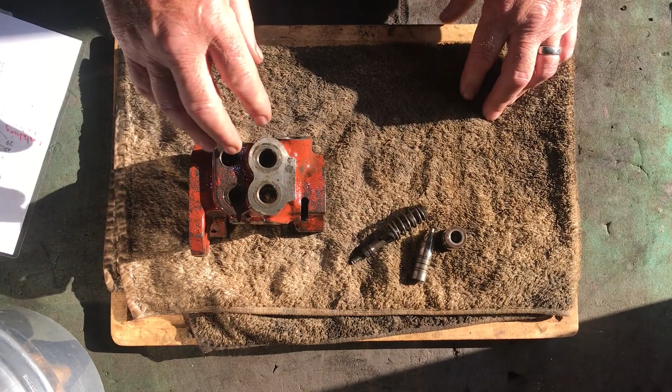Right, valve chest. What we did, we'll pop this into a pan, pressure cooker, with water in. I'm just going to go back in there in 5 minutes. We steamed it in there for 20 to 25 minutes to let the heat from the steam penetrate the casting as much as we possibly could.

It then went from the pan into an ice cream tub full of diesel, and it sat in there for 2 weeks. I was going to leave it in there for a week, but then we went away on holiday, so I thought I'll just leave it sitting in the diesel and let it chill. When we came back from holiday, popped it back in the pan, heated it up again, popped it back in the diesel. When it cooled, got it out.

Obviously the spool is in here. Put a punch on top, gave it one firm tap with a hammer, and it moved about 2 or 3 threads. Then I turned it upside down, put the punch on the bottom, tapped it, knocked it back in again, and it moved about 4 or 5 threads more. Turn it back over, punch on the top, whack again. Just kept doing that - the movement got bigger and bigger, and it eventually came out.

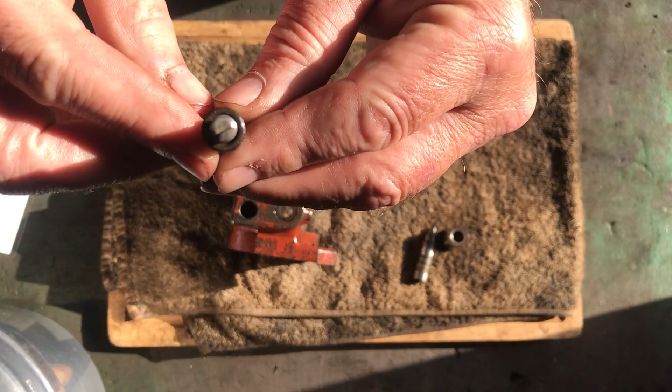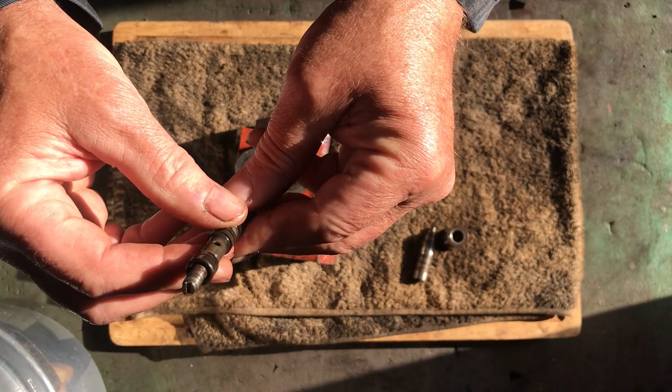You can see on the end there, there's a little bit of rounding over from the punch, but that's just a screwdriver slot so you can hold the spool still while you're tightening the nuts onto there. That'll dress up, that'll clean up a treat, no problem. The place it was rusted in was just in the top here - this part of the spool valve was the one that was rusted in.

When they popped it out, all this was full of oil. Looks a bit grotty, but they're nearly 50 years old. So there, the edges on there are absolutely razor sharp. So it hasn't worn.

I don't think it's seen a lot of abuse. I think the tractor's been abused, but I don't think this valve's been abused as such.

So the next thing, that was the spool and the spring came out, right, that was out of this hole here. The next thing was the insert in the relief valve. This is the one where the dump valve screws on the top of here.

This is your return valve, the overflow valve, isn't it? This one puts the oil back out here, comes around, sprays oil all over the gearbox and everything out of this one. The insert was stuck in here.

We got this one out by putting the 3/8 UNC bolt into it, pulling the insert out and punching the cap out of the bottom.

This one, let's have a look. Where's my little bag of toys? This one we got out by using a 6mm concrete anchor bolt. Not this particular bolt, because the one I used got deceased during the extraction process.

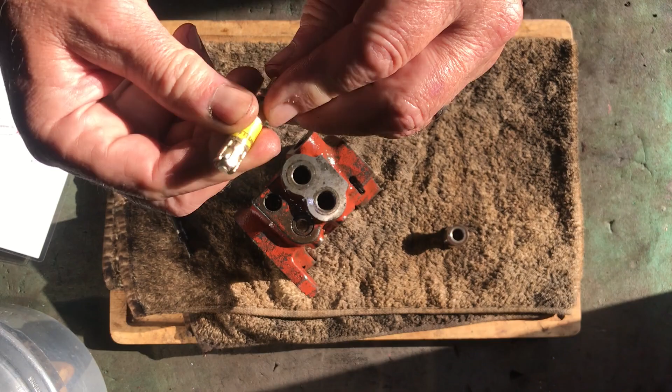What I had to do was, in the bottom here there's a little square nut, so we had to push the threaded section through till the nut popped out the bottom, which allowed the fingers to close up even more. There's a little retaining spring on here that wraps around, that keeps these fingers under control. I had to take that off because this would enter up to the spring, and then the diameter of the spring would catch on the top and stop it going any further.

So what I did was I whipped the spring off. The nut was out, as I said. We'll pop that down. We then put that in as far as we could get it.

So what we did again was we knocked it back into the hole, we pulled it out, we knocked it in, we pulled it out, and that started it moving. Eventually it came out. You can see on the bottom of here and on the side here where the corrosion is, where it's had a hold down inside there.

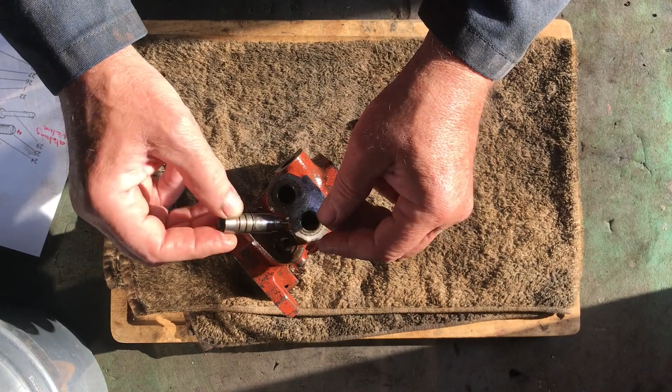That's still a bit tight, so what we're going to do is give this a polish with Scotch Brite. This will get a polish up with Scotch Brite on the faces here and down in here, and the holes will get a polish with Scotch Brite and maybe a bit of Brasso polish.

We're going to try not to do anything that is invasive or aggressive, because bearing in mind this is probably the most detailed and intricate part of that tractor, and literally if you haven't got a valve chest, you haven't got a tractor.

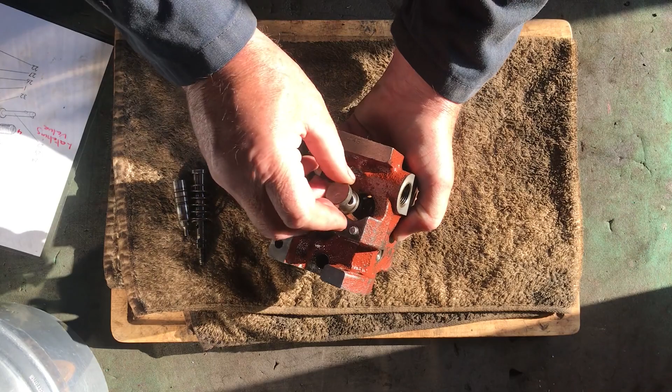That left with a cap, so we pulled the insert out. That left with a cap on the bottom, so we can get in here now, put a punch down in here, punch the cap out the bottom. You can see on the cap there, in the bottom, there's a bit of very light surface rust forming.

That took, you had to be firm with that to get it out, because that in there is a really good fit. It might be that when we come to put it back together, I'm going to pop this in diesel or pop it in oil, and I'm going to heat this up so it expands slightly, just a touch, enough to make it easier to put these two caps back in.

I have heard Shane dropped us a message. You've got to put Loctite 601, I believe, on here to seal them in.

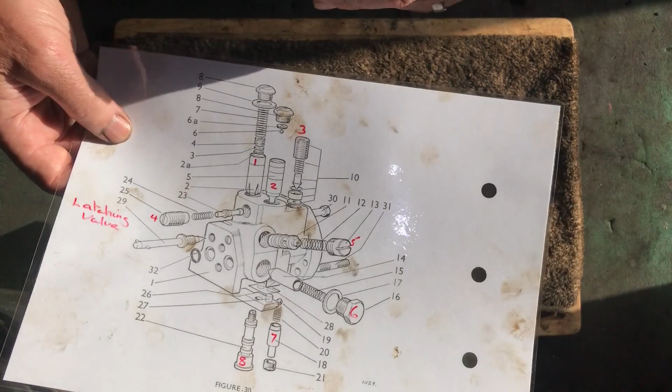So that just left with now down in the hole in here. I don't know if you can see that. The only one that's stuck now is the insert for the lowering valve. So a quick butcher's on here. Where are we? Insert for lowering valve. This one here. This is what's stuck.

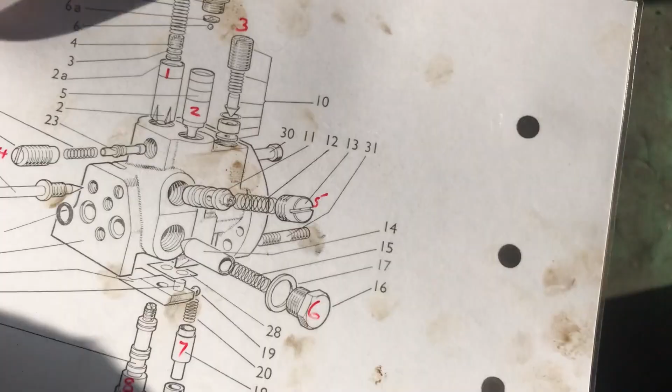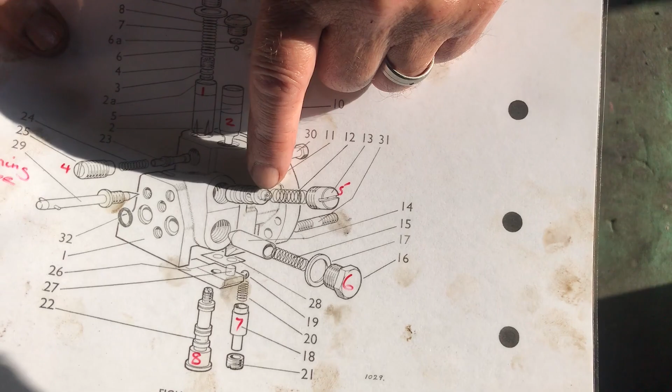It's got a nipple on the end here. Now what we're going to do - the same guy that removed his insert, removed his lowering valve insert with a socket. He got a socket that was just smaller than that and tapped it on. I've got a feeling that the tapping process plus the fact that the socket went on possibly moved his insert, and he was able to start and rotate it back and forward to a point where he broke all the rust off it, and he was able to get this out.

So that's the plan. As soon as I finish this video, it's going to go back into the pressure cooker. It's going to get cooked for 20 minutes, then straight into diesel, and it's going to sit there for another week.

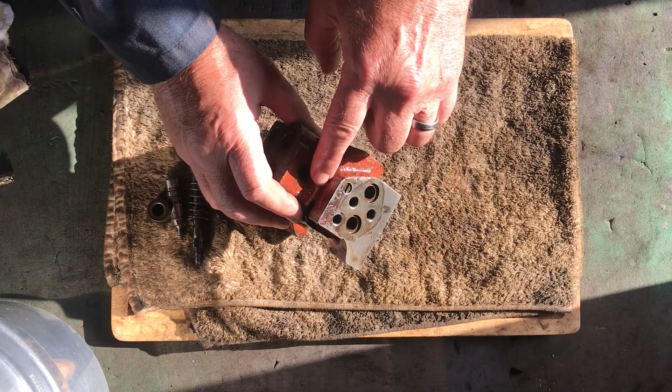With a bit of luck, the heat will expand anything that's in here - any voids, any liquids - and push their way out through whatever orifice is there for them. Hopefully when we pop it back in, you can see the surface rust on that. When we put it back into the diesel and it cools, it'll draw the diesel in.

Now this is cast and that's steel. Cast iron has a bigger coefficient of linear expansion than steel. Therefore, in theory, the casting should expand quicker than the steel, and it should expand further than the steel, thus breaking the hold or weakening the hold that that has in there.

We'll see, but we'll work on the principle at the minute that this is savable, because what we're going to do, I need parts for that.

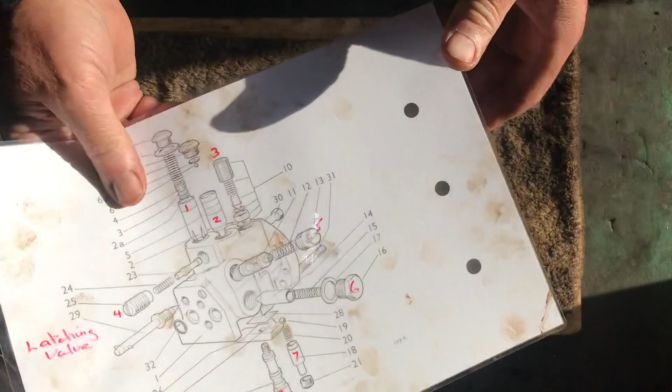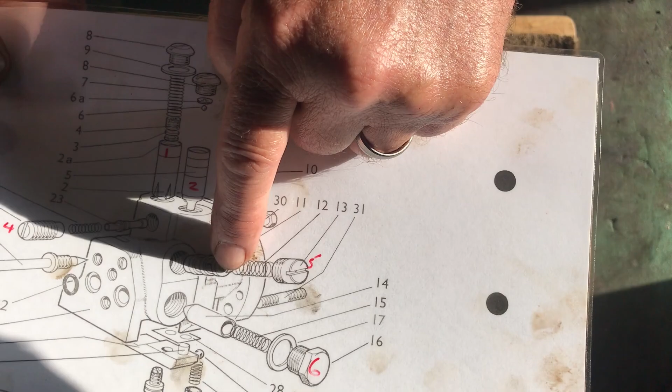The bits that I do need are these bits here. I've got the aluminium shim at the bottom. There's some sort of spacer cup thing that goes on here. There's a screen as well in the bottom of this - I think it's a 20 micron nylon screen. So I need the screen, I've got the washer, I need that cup. And then we'll put it back together.

Colin has sent me the name of a guy who's good with hydraulics. So if we can get this back together, and I'm happy that things are worth spending a bit of money on, I'm going to get this away to have it tested, because as David said, this is right in the heart of the tractor. If you put this in and it doesn't work, it's quite a bit of work to get it back out. So I would rather spend a little bit of money and have it tested, and somebody say to us that doesn't work, you need to replace it - or the fact that it does work, or it doesn't work 100% but it works good enough for what we need.

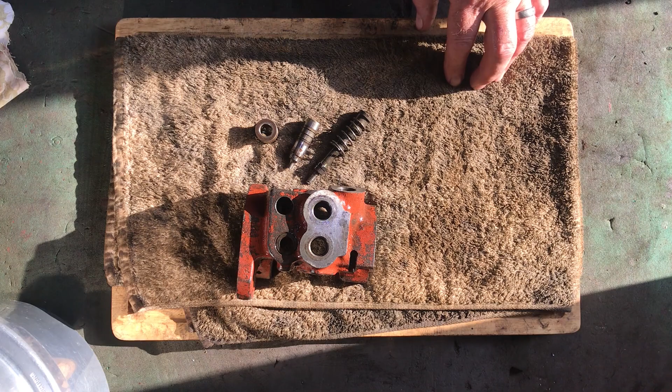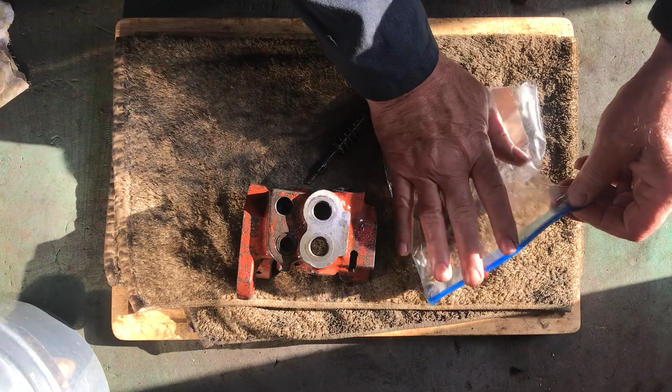But that's the plan. So all our bits are going to go off into our baggies. Where's our baggies? So let's have a look. This one here, number two, is the relief valve, which is that and that - they're going to number 2. Number 8 is our spool valve. And then here we've got our two nuts and our washer and our broken circlip.

So our spool valve and our spring pops into there, or squash the air out of them. It just means that when you pop them away, if you accidentally put something on top of them, it doesn't pop the bag, and you don't just end up with a big drawer full of bits.

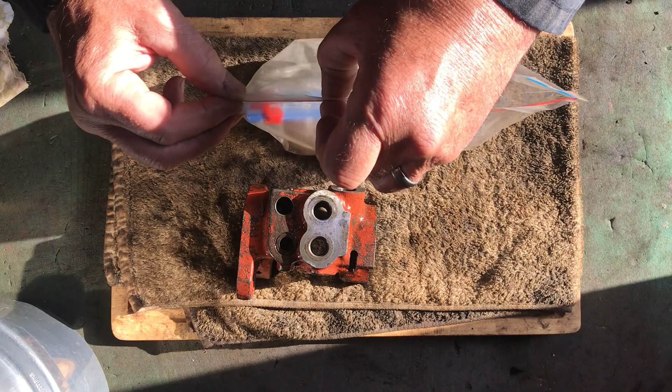Right, so that's the plan. We're going to go soak our valve body again, put it in the diesel, let it sit for another week, and we'll see what we get from it. Alright.

Right, well that's it for this weekly one. Not a lot going on, but we have been really busy doing other things. Probably going to be busier next week as well, because I've got a full week driving next week. So, well, never mind, you've got to get the pennies from somewhere to fix the things, haven't you?

You know, if we need to buy a valve chest, or when we're talking about our audio, if I need to buy a preamp, you're looking at a couple of hundred pounds for a preamp. But we'll see, we'll see how we get on.